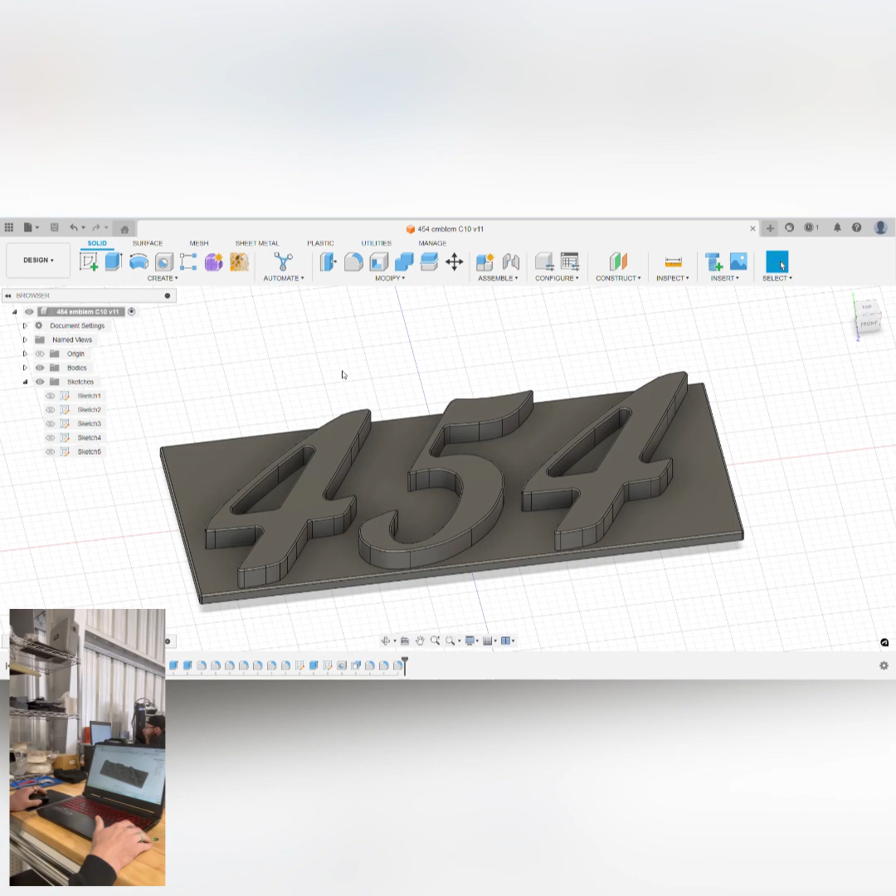I'll take you guys over to the CAD software real quick and show you the design I came up with. This is the little design for the emblem, and I'll show you how I did that. I'm using Fusion 360 here. Really simple, easy to use software, and this is a really simple design. Only took me a couple of minutes, and here's how I did it.

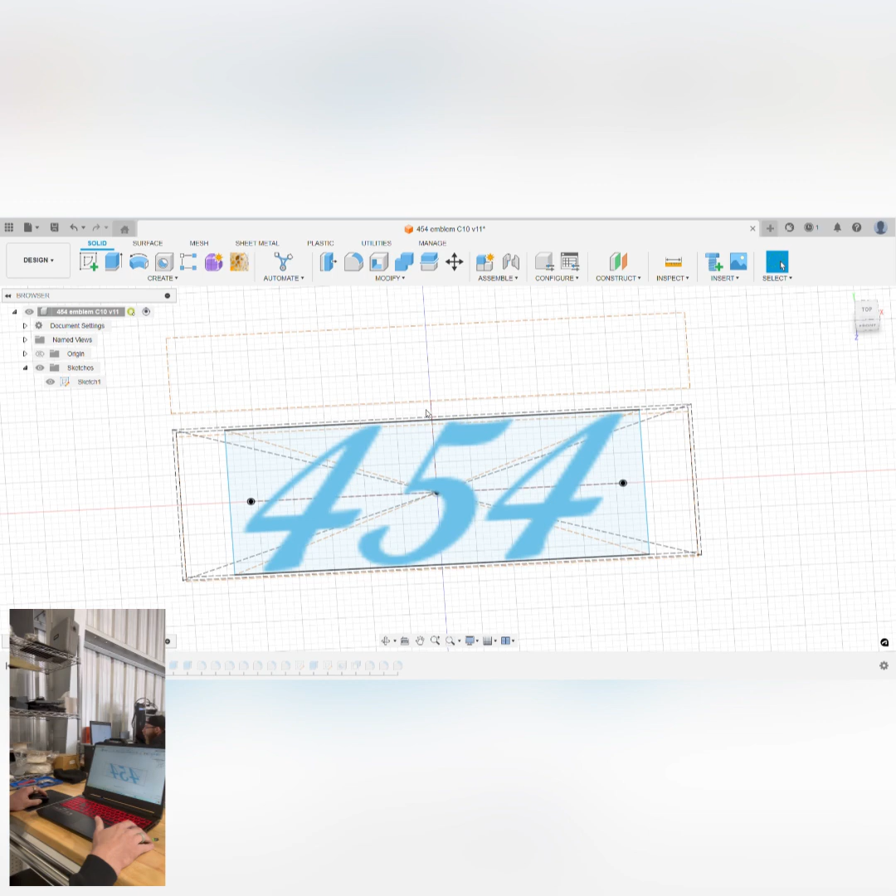Initially I threw in my measurements. This is the width of the initial logo, and then the bottom line here, and then I placed the mounting holes that I took the measurement from off of the fender, the right distance between these two so that they wouldn't crowd and I'd have some clearance. Then I drew this outer perimeter as my max line. I knew I didn't want it to compete with the actual C10 logo size-wise, so from there I just worked down.

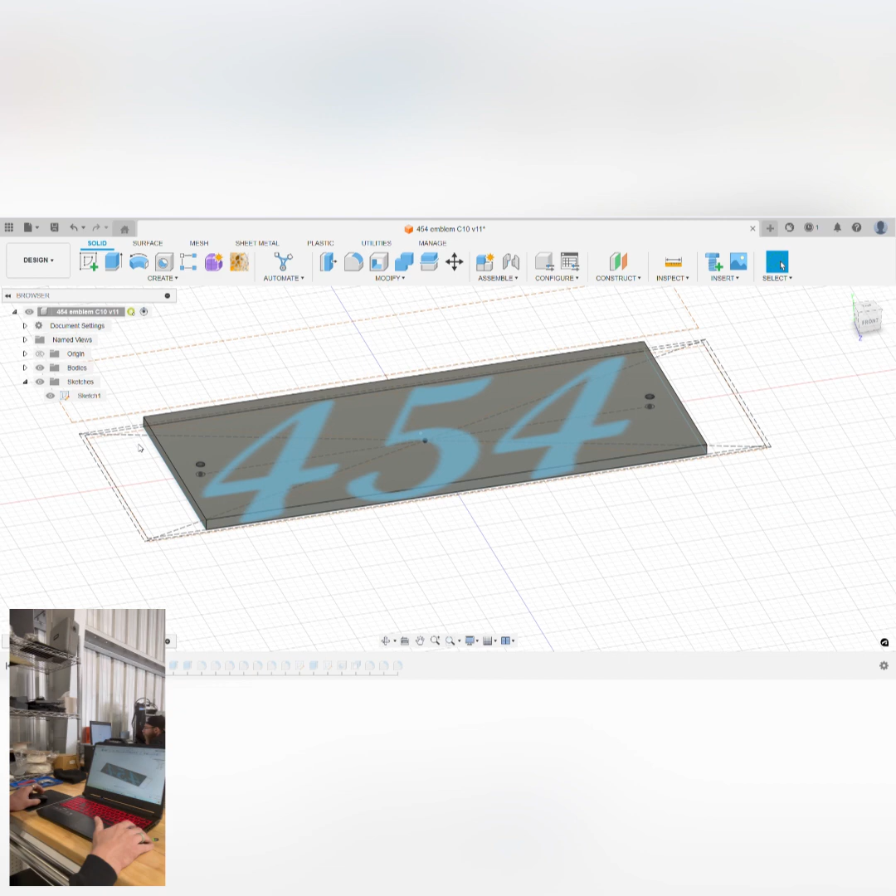I created this little block, and I used a simple text command to create the 454, played with a few different fonts, found one I liked. Then I extruded the base of the badge out first, just a simple 1/8" thick extrusion. Then I extruded the 454 text itself. I drew on some more geometry throughout here. The mounting tabs we came back and fixed later, so we'll skip past that.

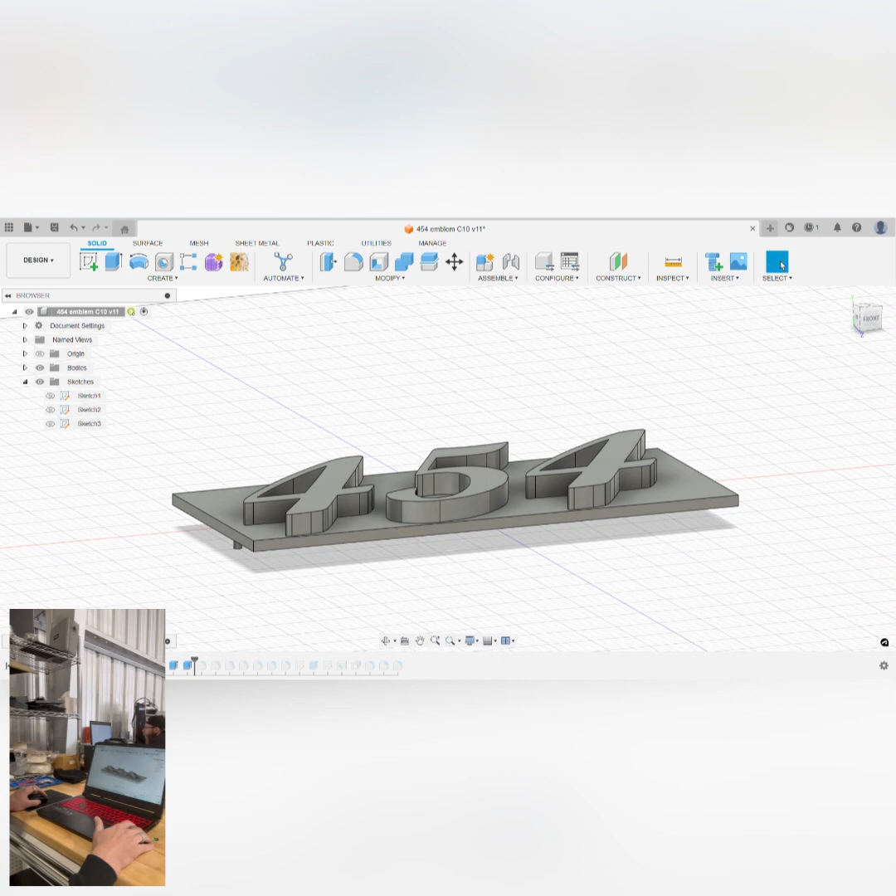Then I wanted to round off any of these corners that could be sharp, so I used the filleting command to round the corners ever so slightly on some of them. But what I needed to do was what you just saw, these inner corners here. The reason I did that was because I don't like using tools smaller than 1/8" diameter to remove a lot of material. Tools smaller than 1/8" diameter tend to only have a cut depth of about 1/4 inch.

And while that could possibly work for in here, they're very slow, and they tend to break a lot, and they tend to have a characteristic high deflection amount. And deflection is when the tool is actually bending. And given that they're super hard steels like carbide or high-speed steel and stuff, they tend to snap if you bend them, so you have to feed them super slow.

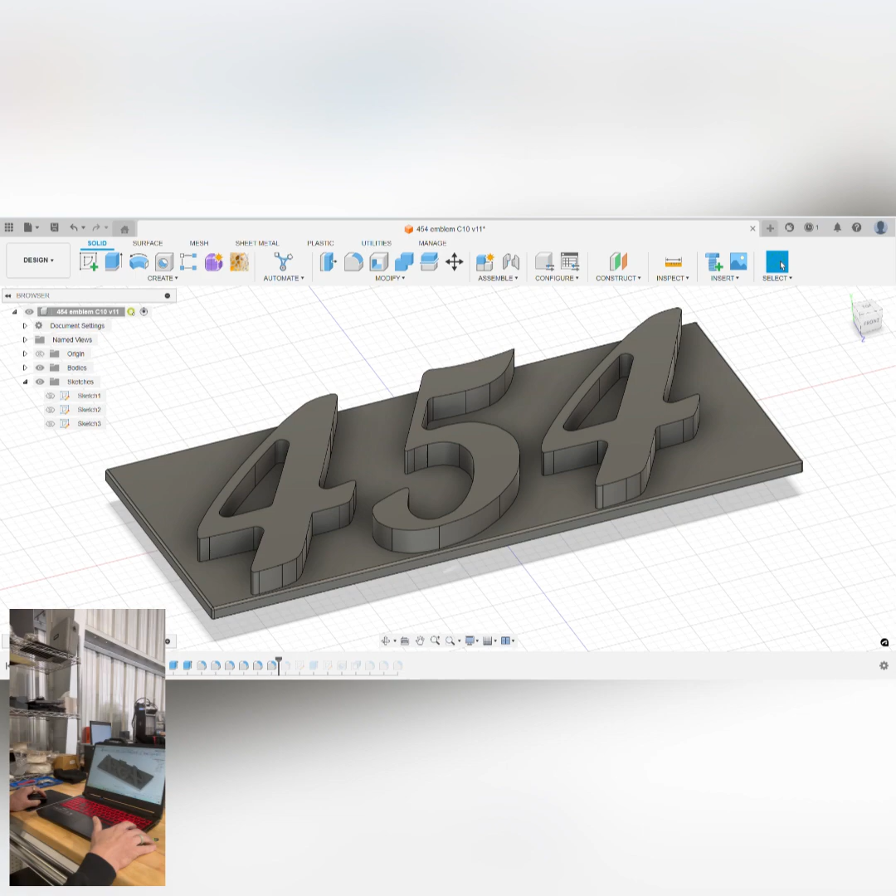And so I didn't think it looked really too much worse to just go ahead and make these corners 1/16 of an inch. So that's half the diameter of our 1/8" tool, and that allows the 1/8" tool to do all of the work in here that we need. And so we went through, rounded out anything that was less than 1/16 of an inch diameter, brought it up to 1/16 of an inch, and then we went ahead and sketched on some geometry down here on the bottom side.

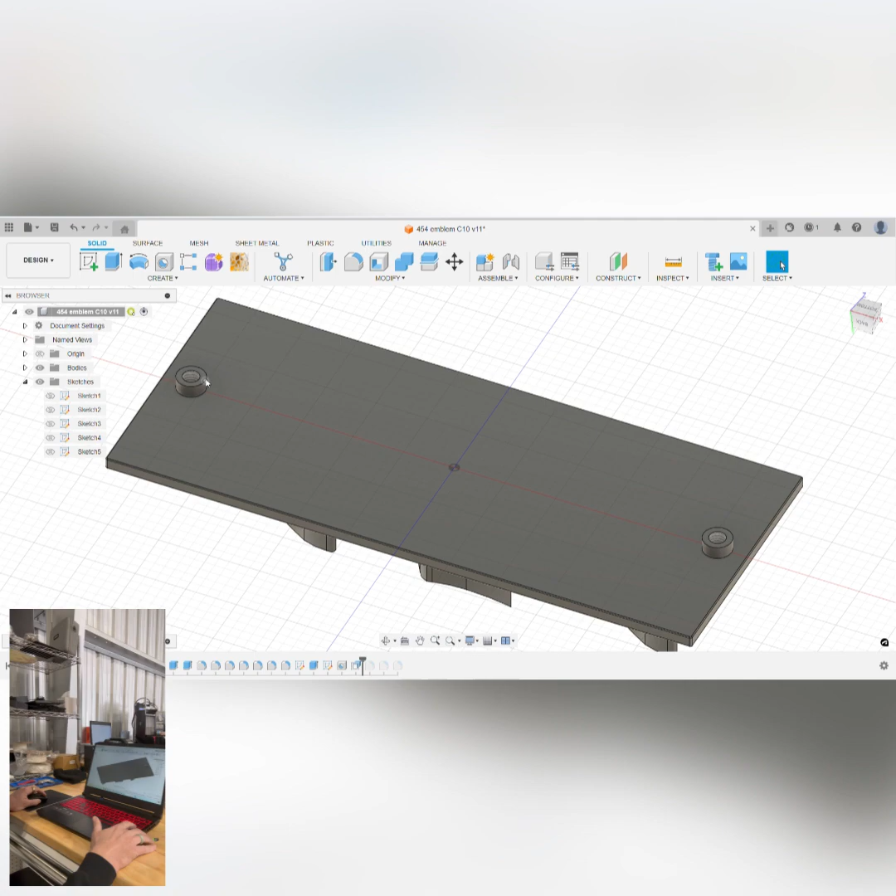These are our mounting tabs. Same geometry that we drew on initially, but I made these a little bit larger because I decided eventually to just drill and tap them for I believe it was a 6-32 screw, and then lowered them down a little bit so that they go all the way through the sheet metal plus a little more. We'll go ahead and use a shim on the back of this to tighten it on.

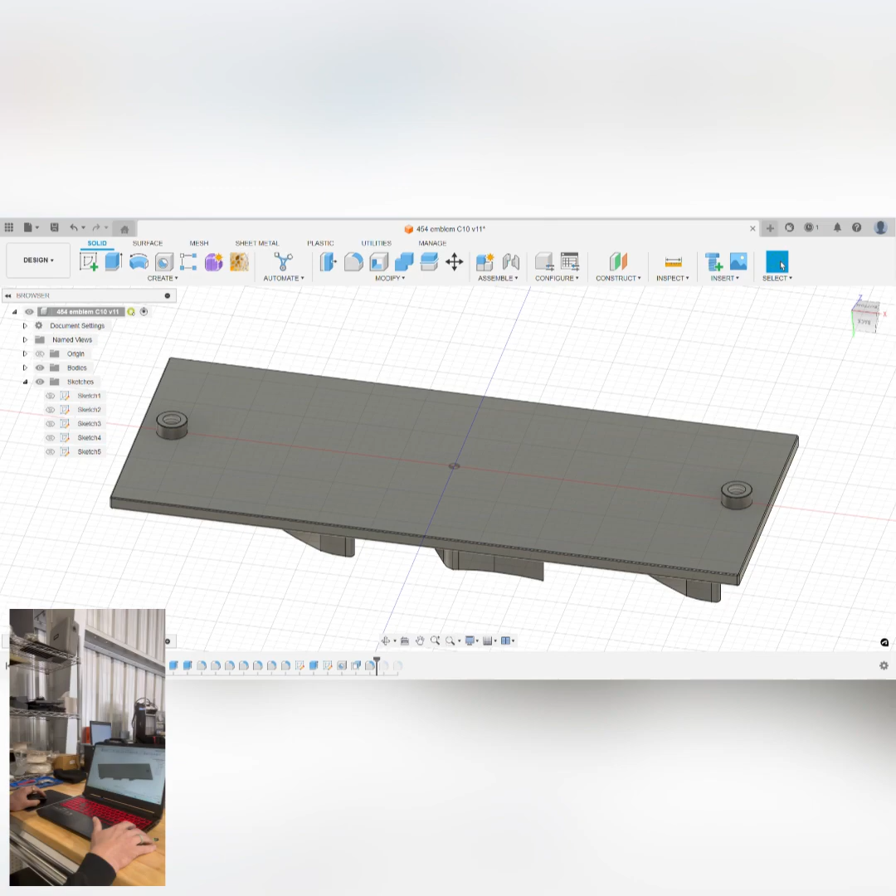And that way we'll have enough threads, because this whole thing here from here to here is only about 1/4 inch thick. And so if we reduce this anymore, we weren't going to really have a whole lot of threads. So I made it a little longer than it needs to, and then I'll probably put like a sleeve or a shim of some sort to tighten it on the inside of the fender, since we're not really competing for space back there. But then yeah, filleted these corners around the back side, cleaned up, added a few more fillets here. And that's pretty much the final design there.

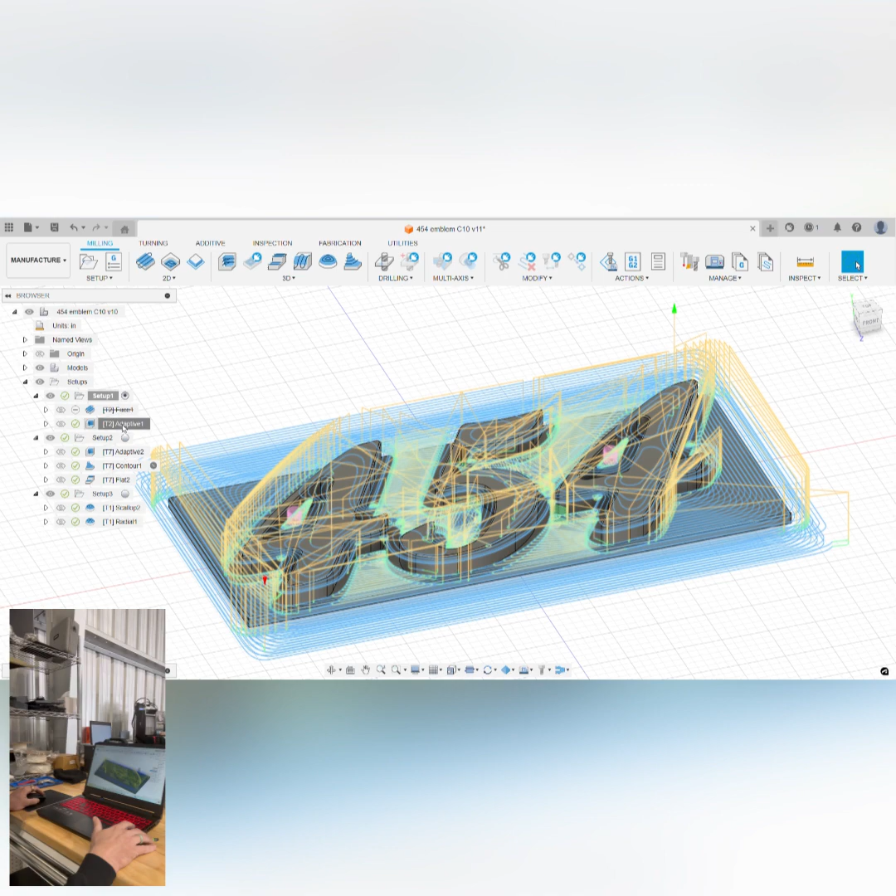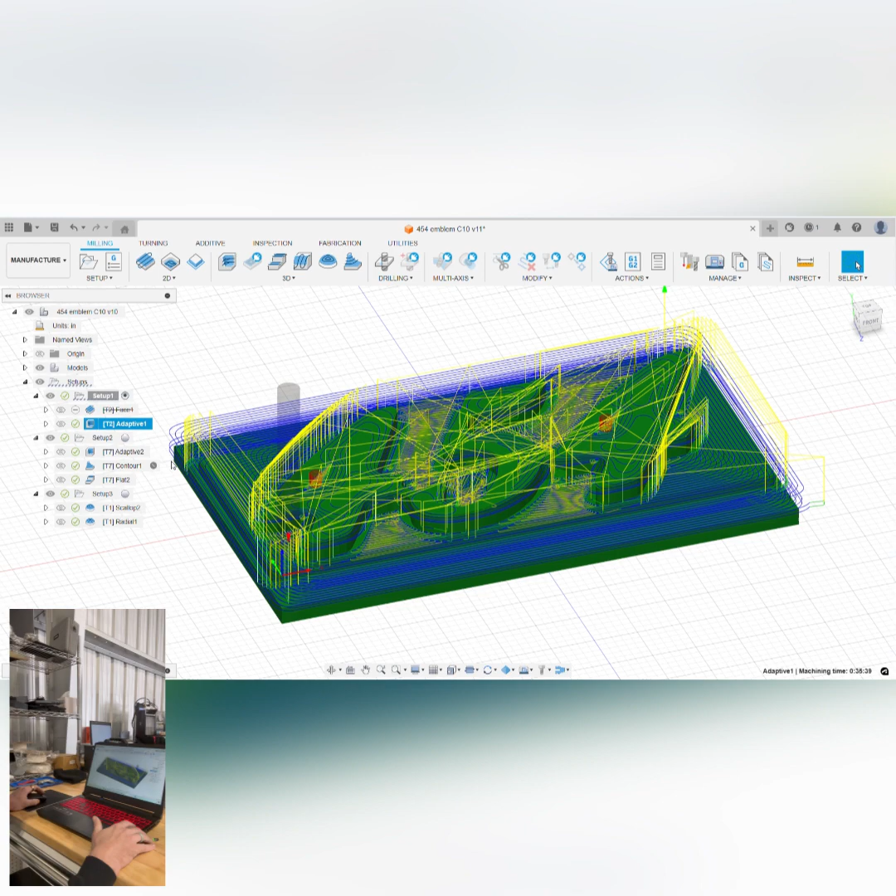So the next phase is we came over to the manufacturing side of the house. This is where you do your CAM, which is how you tell the machine to do its job. And so we'll start with our 1/4 inch tool. That's going to remove the majority of our material. I like to use the largest tool possible to remove the most material as fast as you can, without really pushing the machine too hard, or you know, you got to find that balance between pushing your machine hard and time. You don't want to start small using small tools and have this thing take forever. So we're going to start with a 1/4 inch.

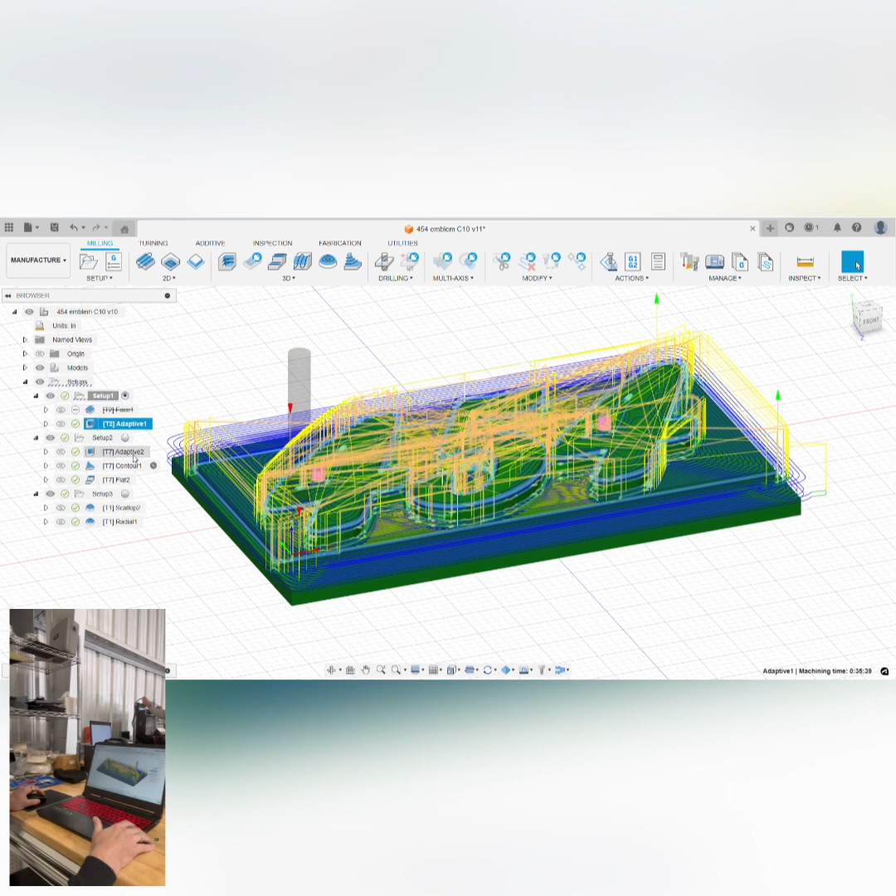We're going to remove a bunch of this, but this is what's called roughing for those of you guys that don't know. And so all of these roughing commands will leave several thousandths. It's up to you. You command it, tell it how much you want, and then you come back through with a smaller tool, clear a little more, and then you go into finishing operations, which are a little slower, and they give you a nice surface finish on all of these. So everything here in setup 2 is actually going to be an 1/8 inch flat end mill. Setup 1 is a 1/4 inch flat end mill.

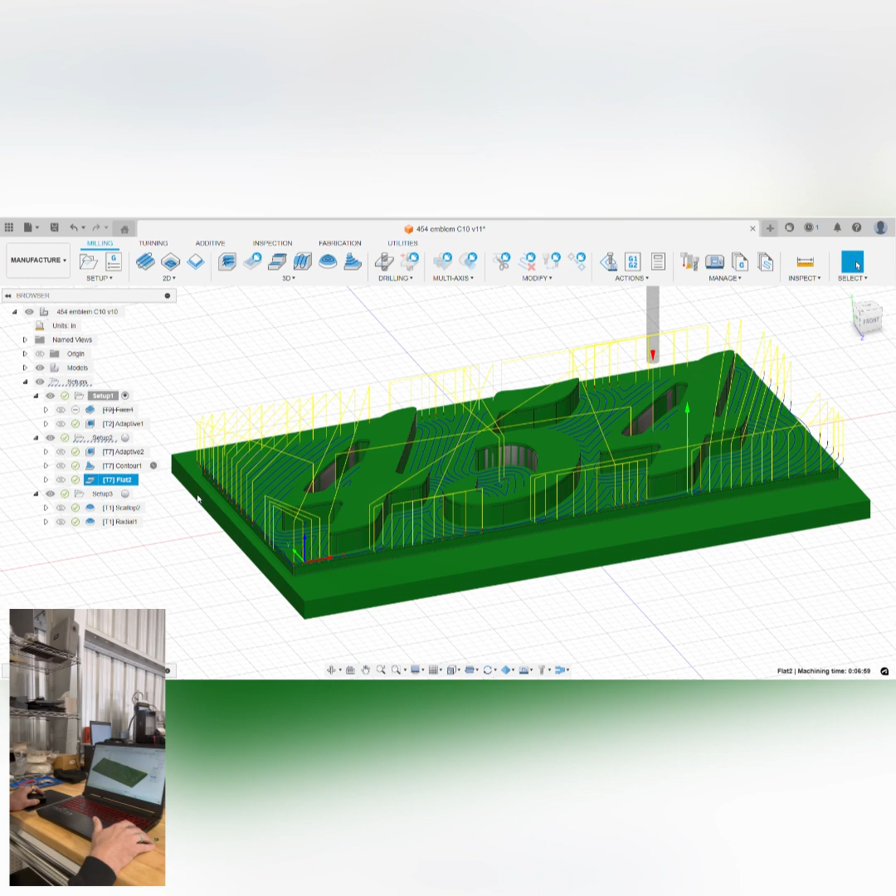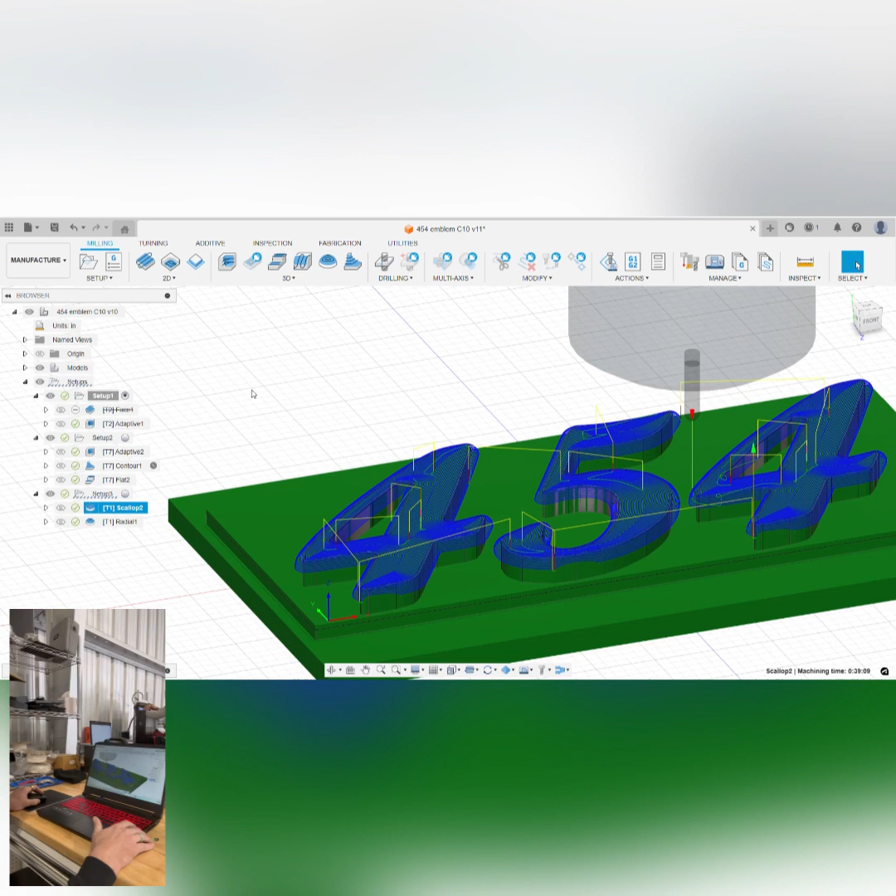And then so we do this flat command here, and we tell the flat command, even though this is technically kind of a finishing pass, to leave a few thousandths, because I want to come in with my 1/8 inch ball end mill, and this is what it will look like before the 1/8 inch ball end mill comes on. And we're going to do some really decorative tool paths here, because I don't want to paint this. I want it to have that billet look, and I want it to have these really neat tool paths that we can get with operations like the scallop here.

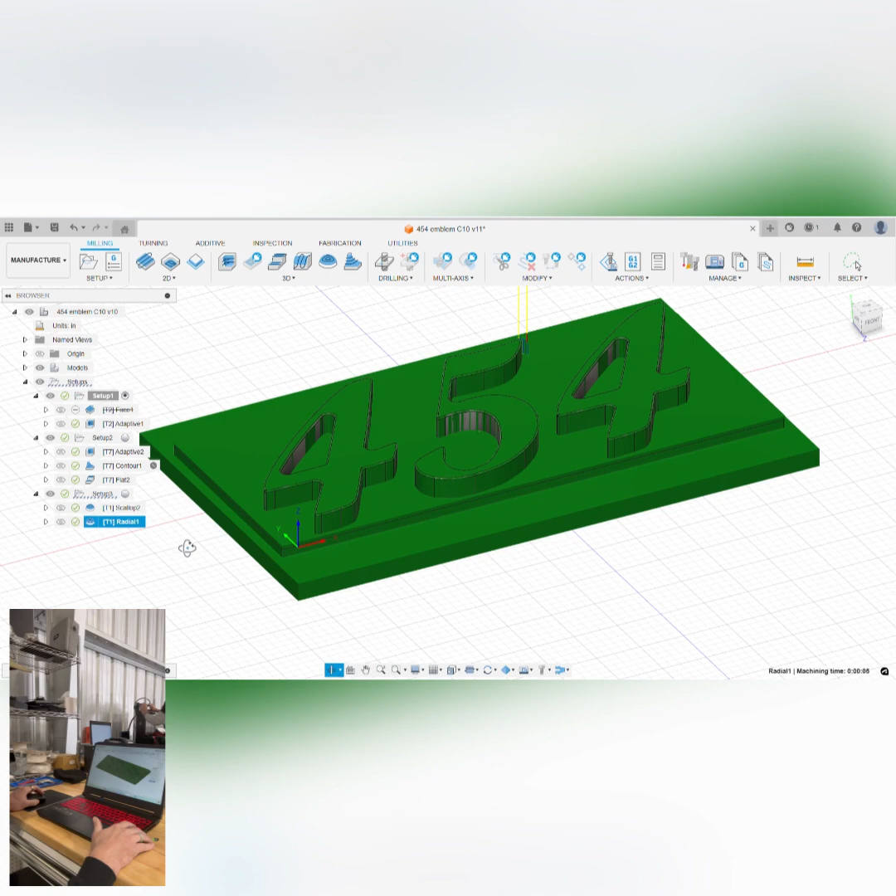So we're going to scallop. That'll give us our fillets around these edges. And then we're going to use this radial tool path here, and this radial tool path is going to give us a nice radius outward. I'll show you guys how that looks when it's all over.

All right, so I'm here in front of the mill. This is going to be our little piece of billet. This is 0.63 thick, and it's a little long, so I'm going to throw it in the bandsaw, cut this off, and then inside of here is our new 454 emblem.

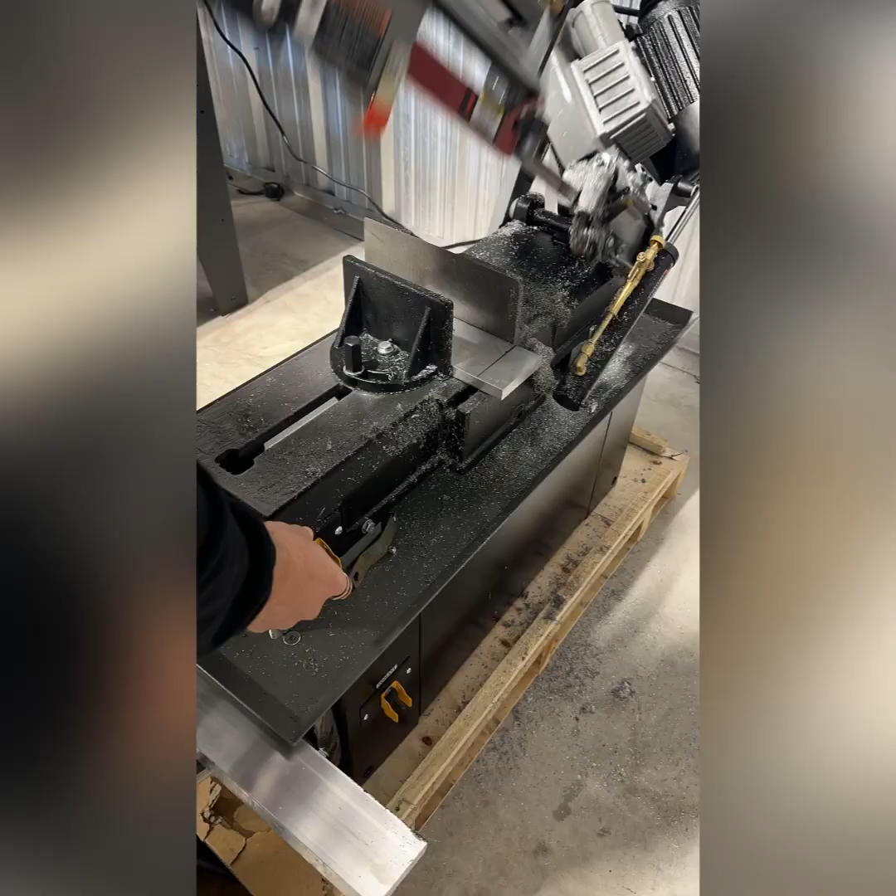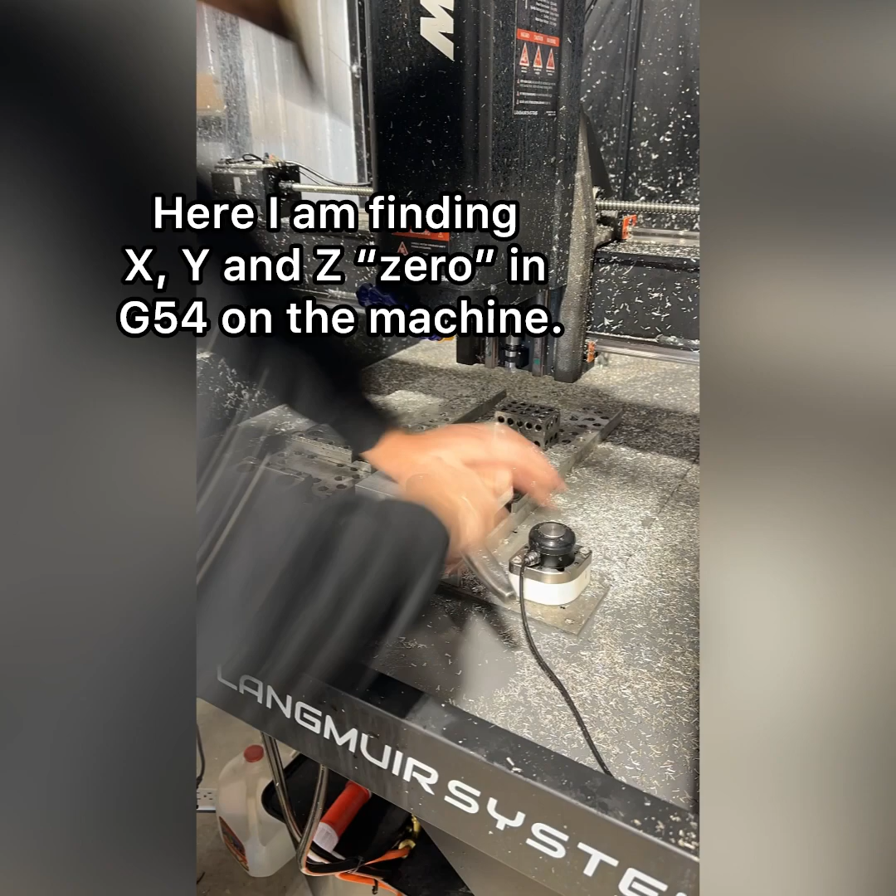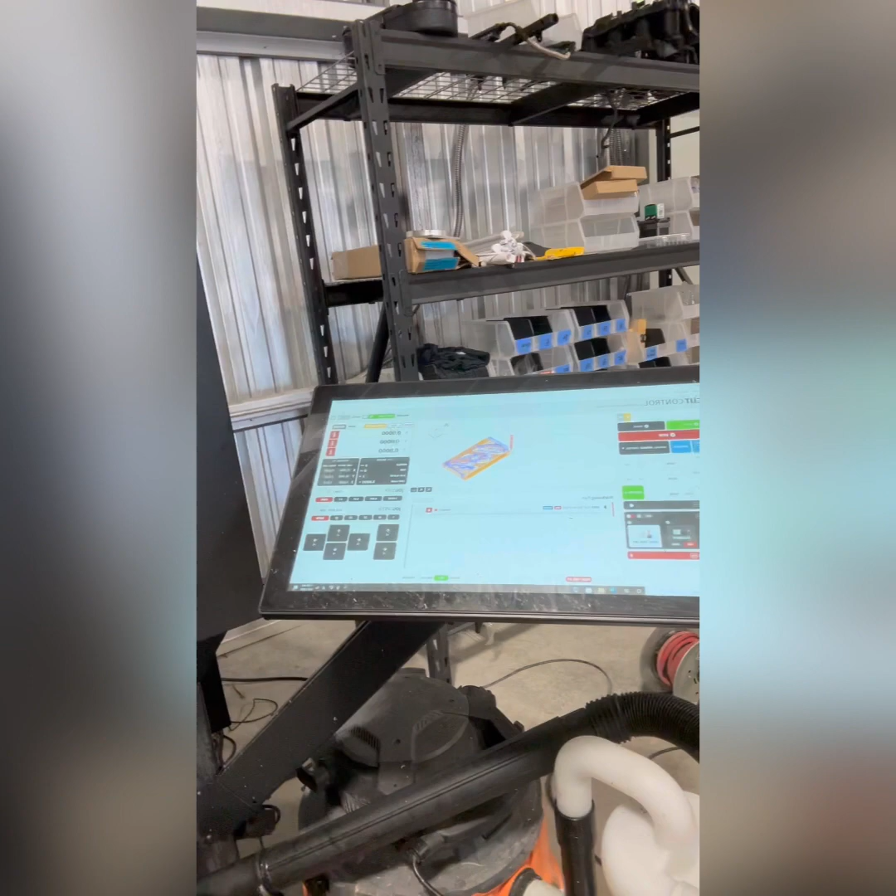All right, so I've got the machine set up, got our program loaded, and we're going to go ahead and run that first operation, that is the 1/4 inch flat end mill. Then we'll move to our 1/8 inch flat, and then we'll move to our 1/8 inch ball end mill, and then I'll show you guys how it looks after each one of those.

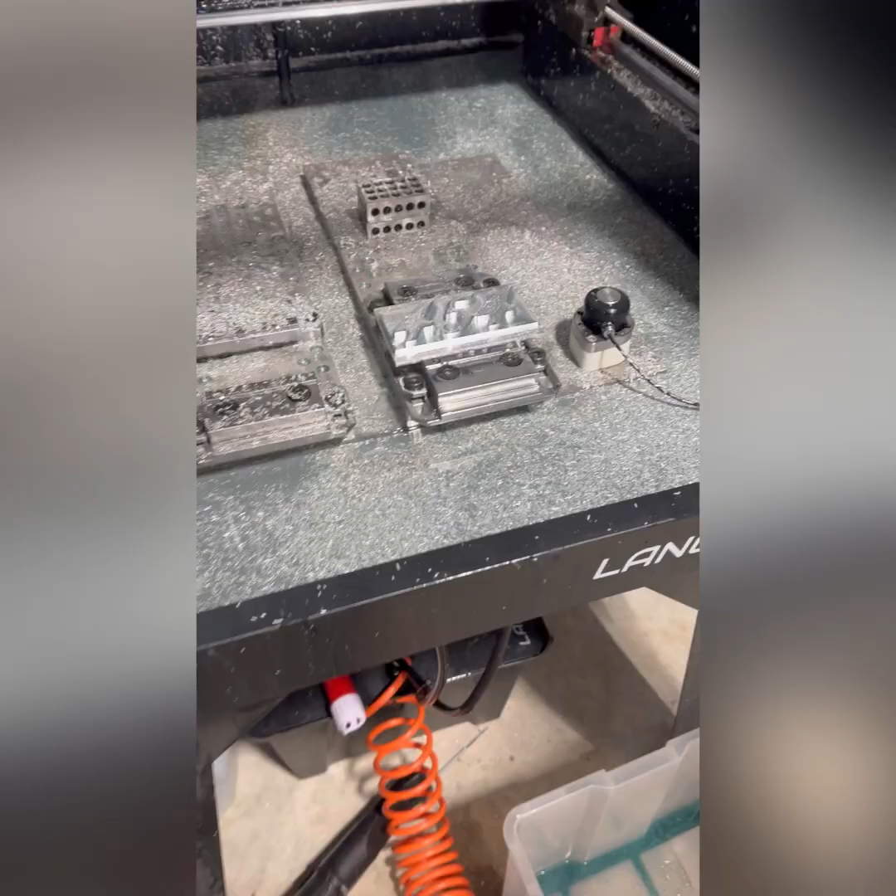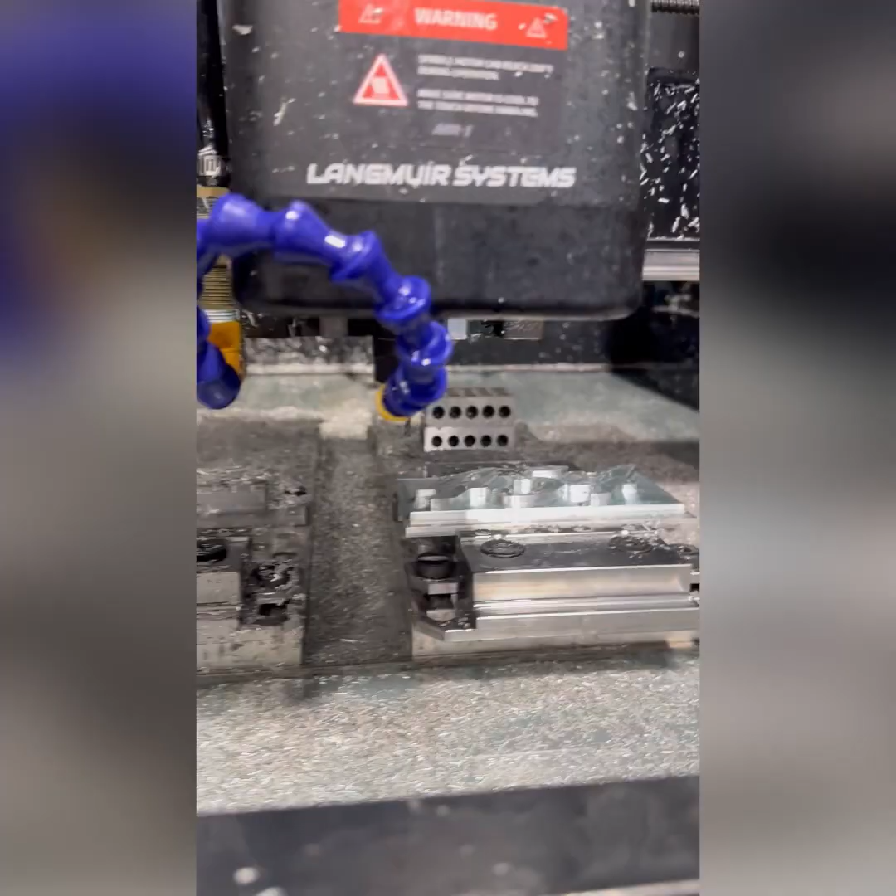All right, so the first operation is done. That's all the 1/4 inch end mill can sort of do. It's cleared out a little bit of these pockets. You can probably barely see it on camera, but the rest is going to have to be done with smaller tools. But I would say that thing looks badass already. All right, our little 1/8 inch end mill is in there, and we're ready to go.

All right, the 1/8 inch flat has done its job, and at this point, pretty much 99.5% of the material on this front side has been removed. And now we're gonna come in with the ball end mill and kind of give it a little more. I mean, I think these tool marks look pretty badass as it is, but we're gonna try something a little more wild and see what happens.

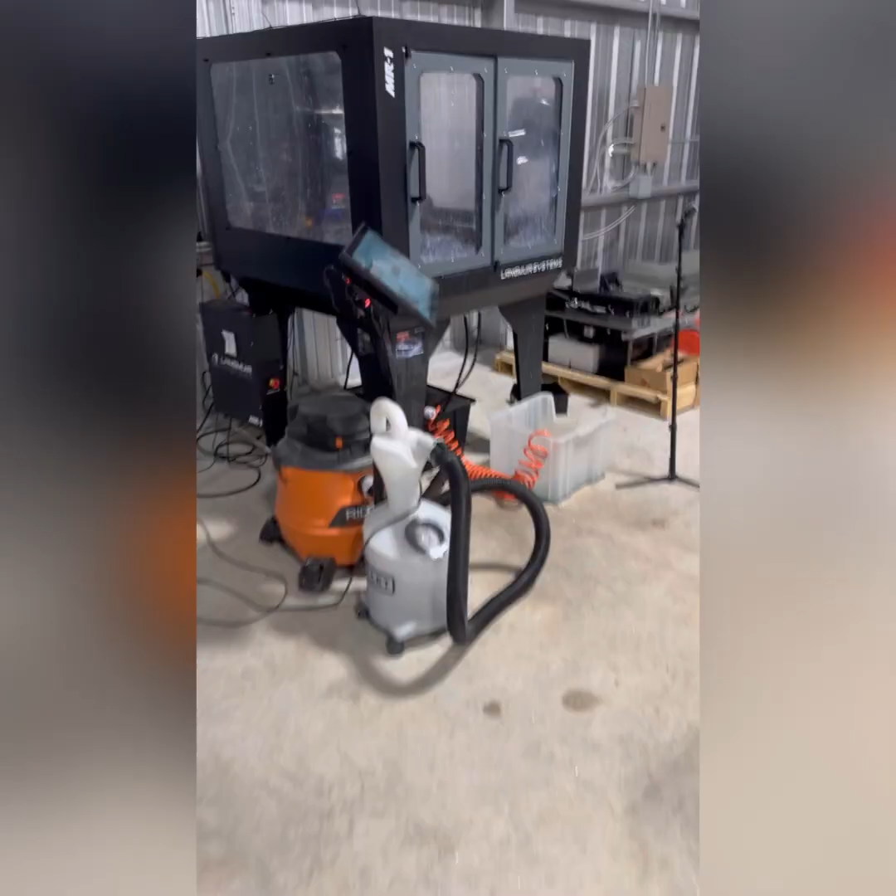All right, the machine is stopped. Let's see what's good. There it is. God, that came out sick. Heck yeah.

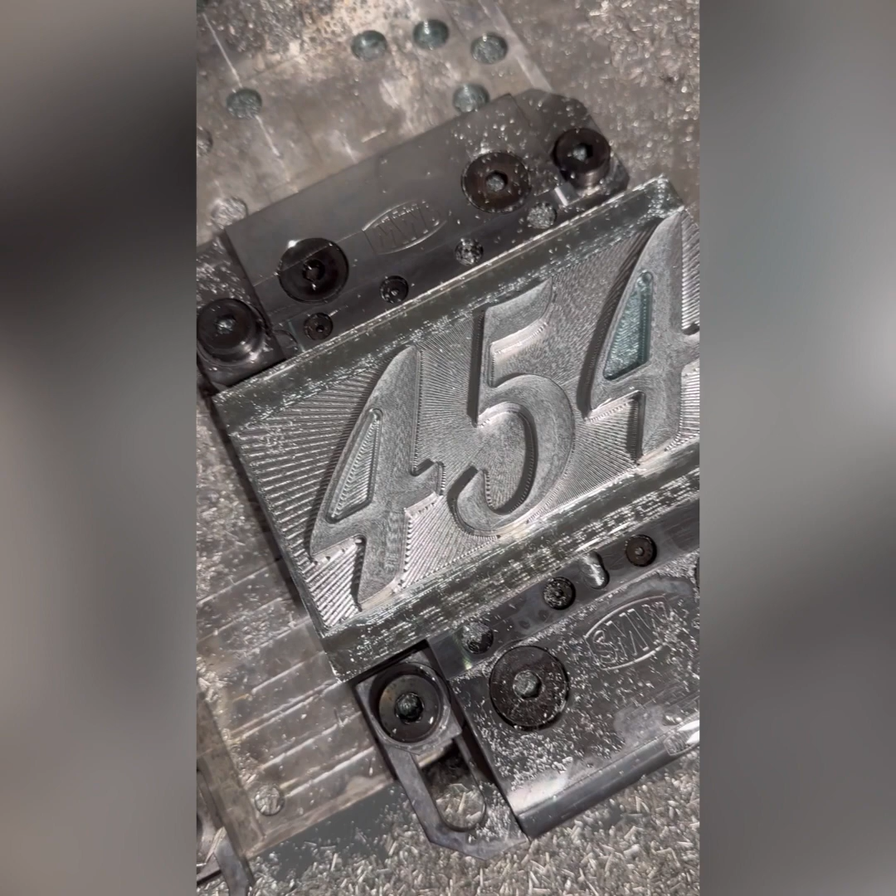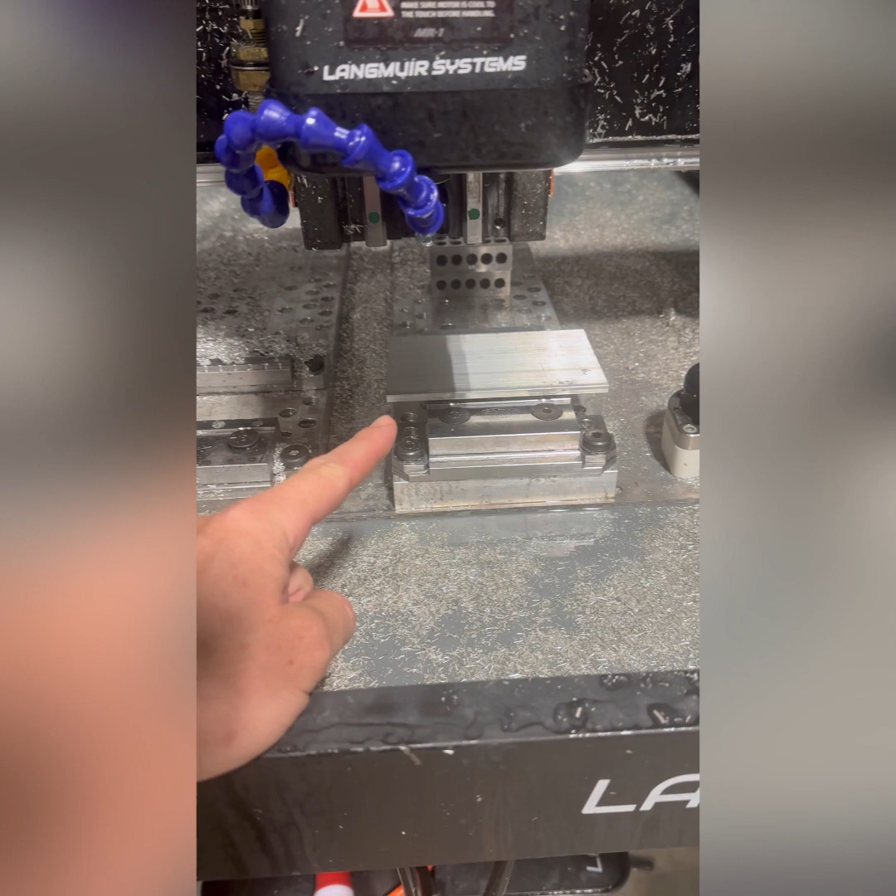All right, so the last thing we got to do, put our 1/4 inch end mill back on and get rid of the rest of this material. And then we'll have our 2 studs. We'll do a drilling operation with the CNC. We'll have that drill it out for us, and then we'll do the tapping by hand.

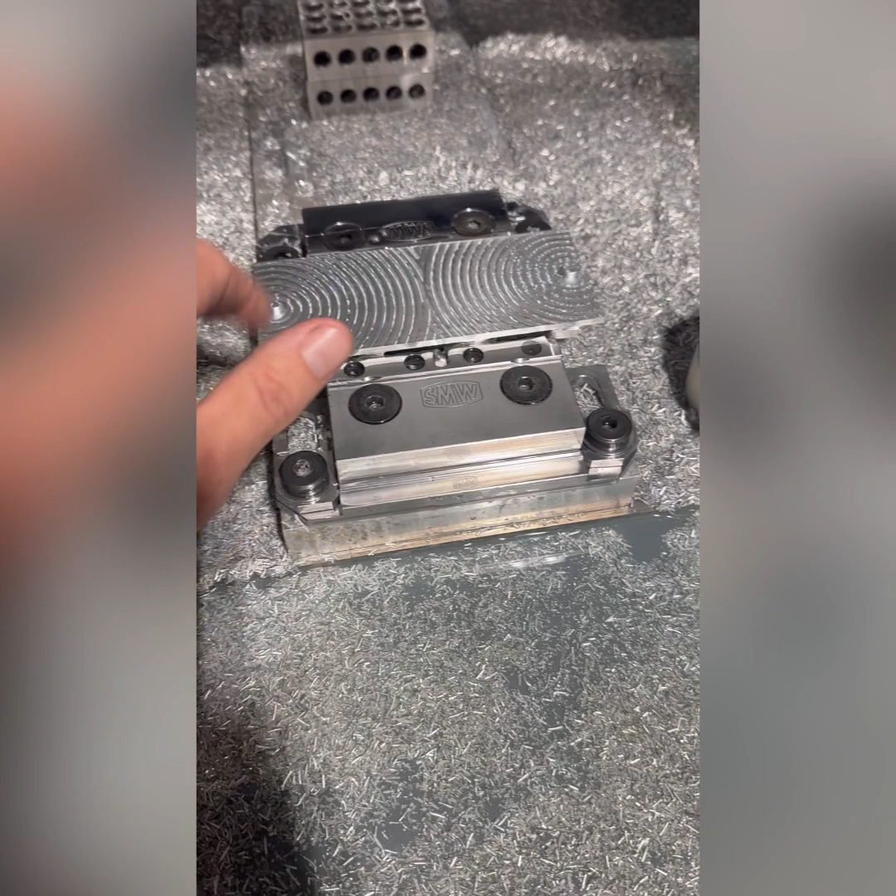All right, now here it is after the 1/4 inch tool path on this backside. And it's basically done. The next thing we're gonna do is load our drill bit into there. Drill these with the number 21, and then we'll hand tap it for 10-32 hardware, and we'll be done.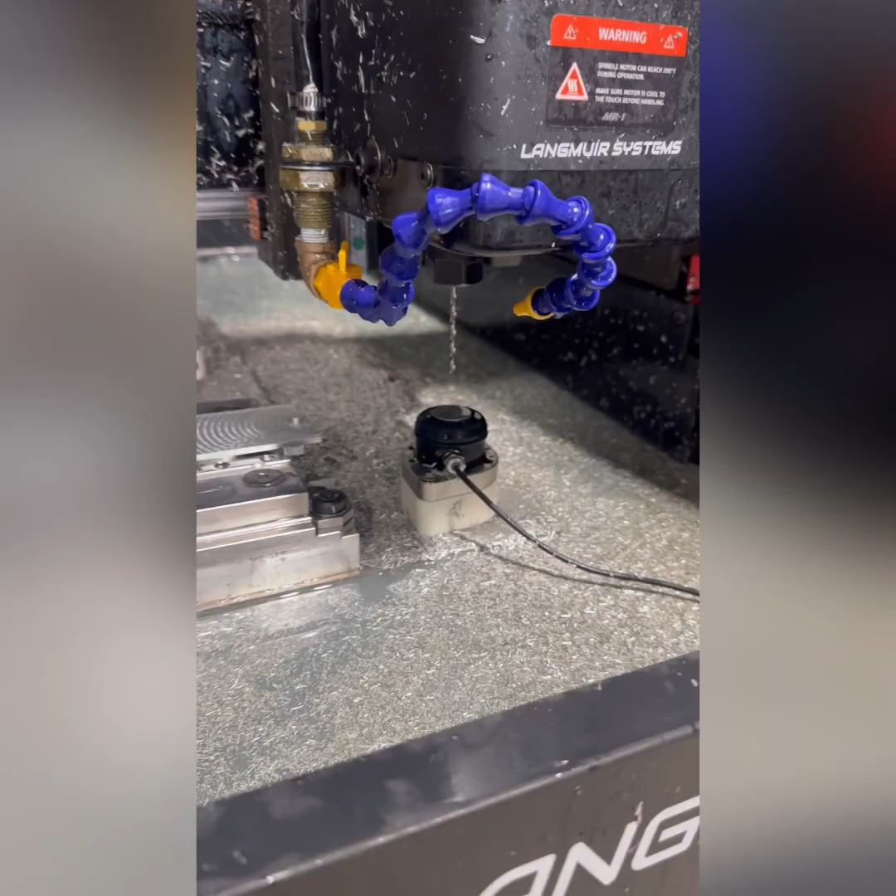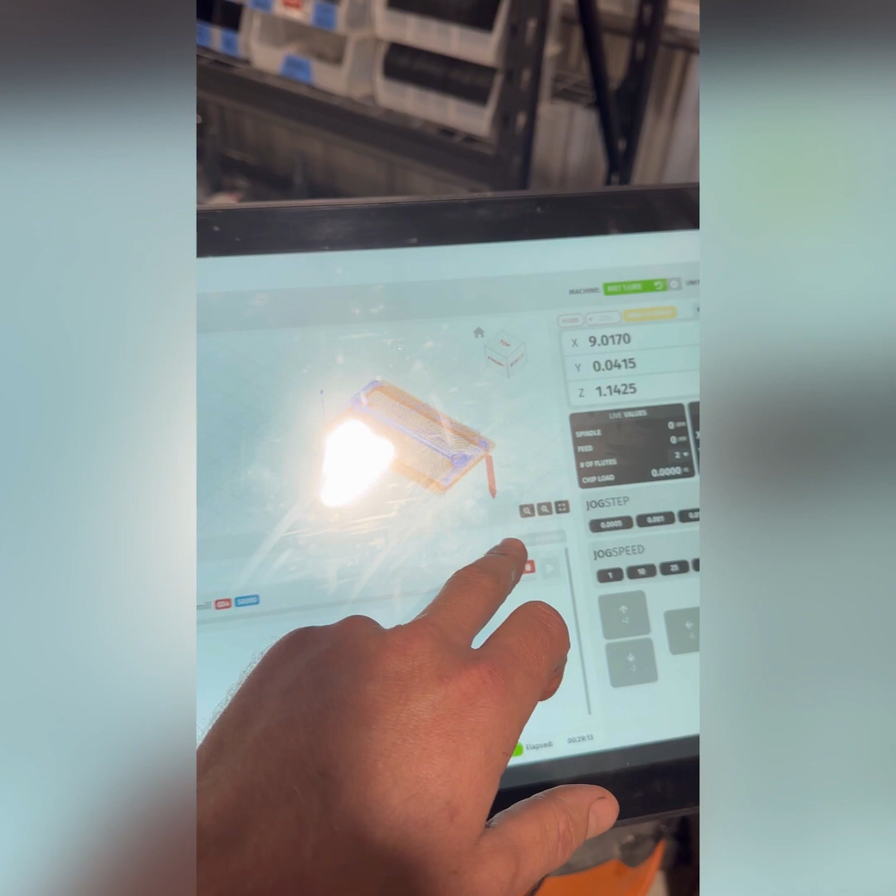All right, so we got our number 21 drill bit in. Come over here, probably can't see this, tell this thing. Tool setter, changes the height. We're good. Get rid of this old program. Load our drilling operation. And we'll just confirm that our XY still looks reasonable. It does. And now we'll run this program.

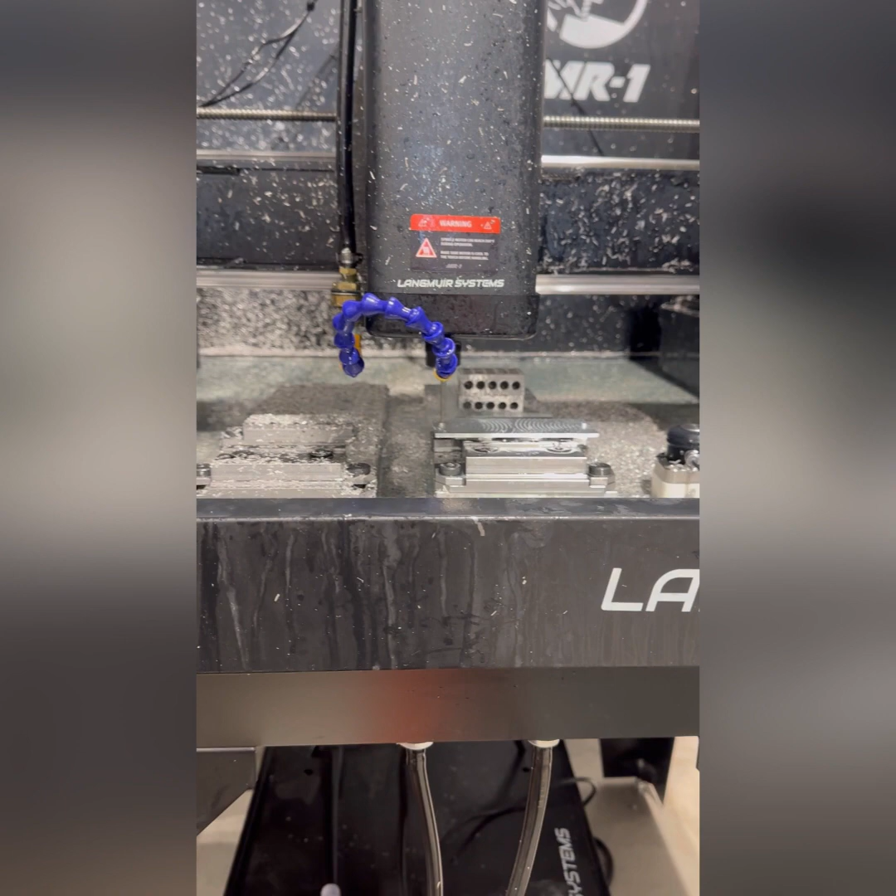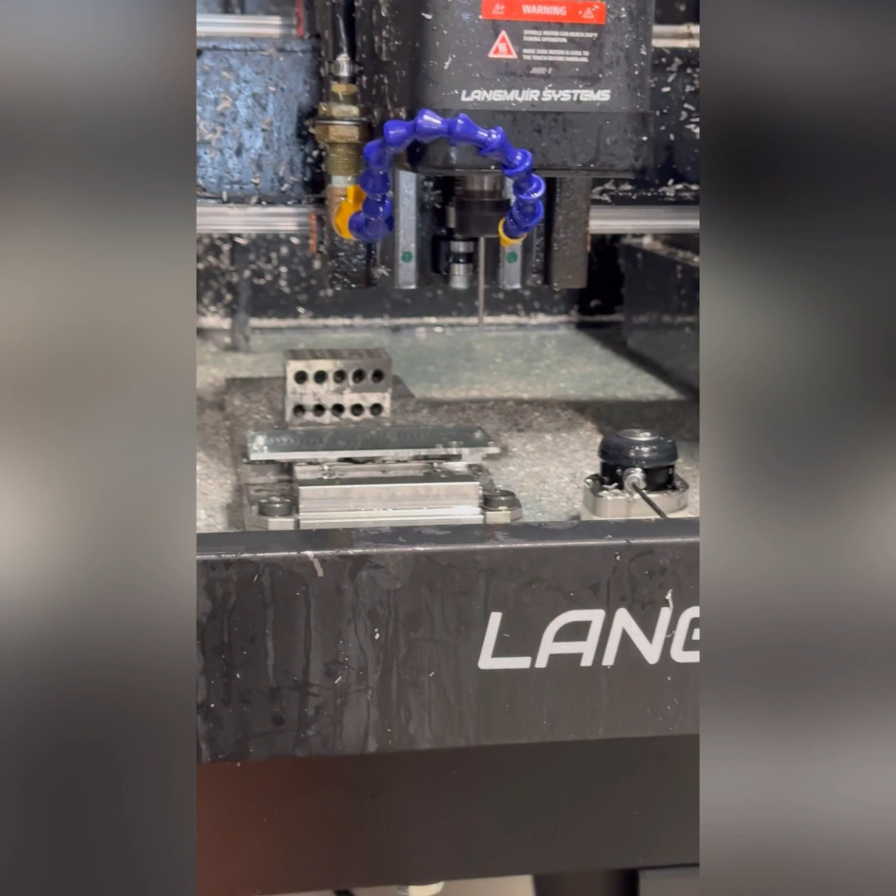So let's get a quick look at it. Still got to drill these fenders out, but that's about where it's going to sit, right there. I think that thing looks great.

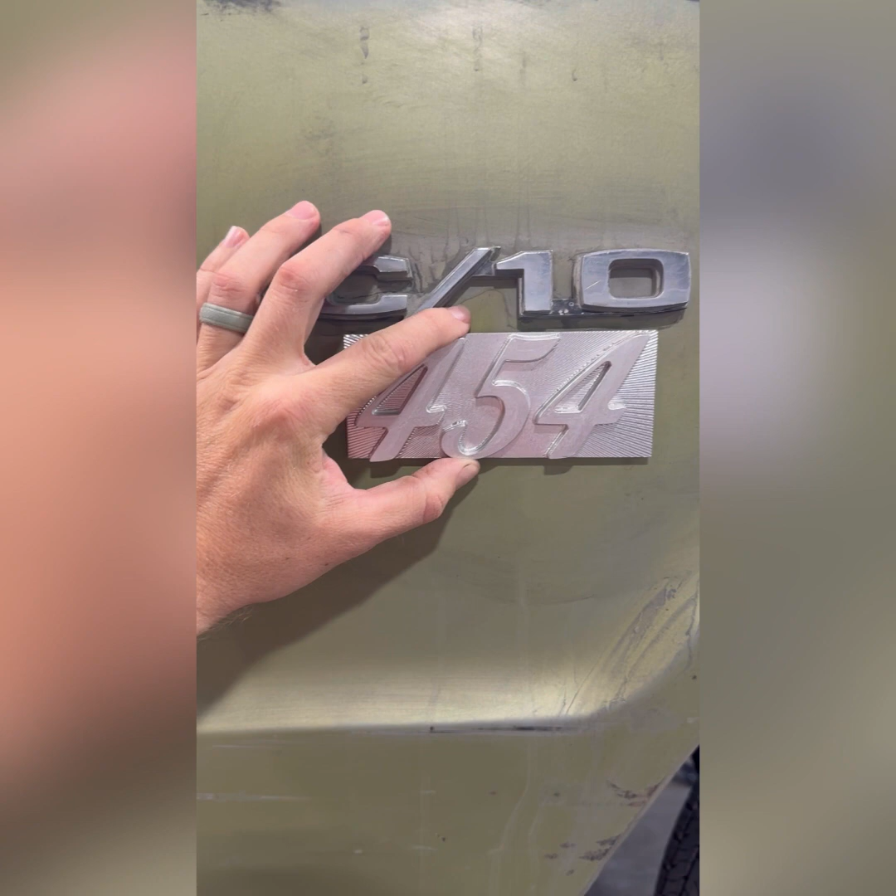So, you know, what did this cost, right? The billet that I chose was 12 bucks. It's made in the US, 6061 aluminum, and it was 5/8 bar stock. And I mentioned the dimensions earlier. So I had that for our ARC 4000 cases on hand already, but I bought a bunch of them and they were 12 bucks a piece. I'm sure if you buy only one, it'll probably run you closer to $20. You know, I bought about 3 dozen or something at the time.

It took me about an hour to design and set up the tool paths to get the mill to do it. And then, I've been kind of farting around in between throughout the day, but probably about 2 hours total machine time, just because I don't push that machine particularly hard. The roughing strategies that I use to remove this on the largest tool, I ran at 40 inches a minute.

For example, for you non-machinists, a Haas, like a mini mill or a VF series or a UMC, those can go over 600 inches a minute. So when we go to production with these, if we decide to produce stuff like this and we have it done by one of our machine shops here, they will probably take about 5 minutes. So it's pretty neat, right?